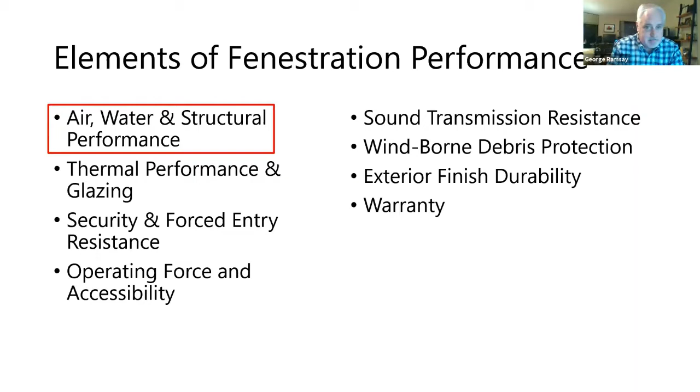So just to make it as easy as possible, we're just going to boil it down to air, water, and structural as being the basis of this presentation. I will touch slightly on the rest of this, but it's mostly going to be on air, water, and structure.

So the biggest thing here is one of the most common questions I get from architects and spec writers is to make them understand the difference between DP and PG. DP, design pressure, is a site-specific measurement, so we'll put in the actual address of that project just to get what the average wind speed is.

A good way to look at that is Miami versus St. Louis, two very different areas when it comes to hurricanes. St. Louis is in tornado alley. So just think of design pressure as being the basis of our calculations, and it really does come down to where that project is. Performance grade utilizes design pressure in that calculation.

But there's all these other things that go into PG, performance grade, and that includes all of this stuff. So DP is part of PG. When you go to specify windows, we'll use PG, performance grade. I just want to touch base on this, and then as we go through this process, at the end you're going to really get a lot better understanding of the differences in DP and PG.

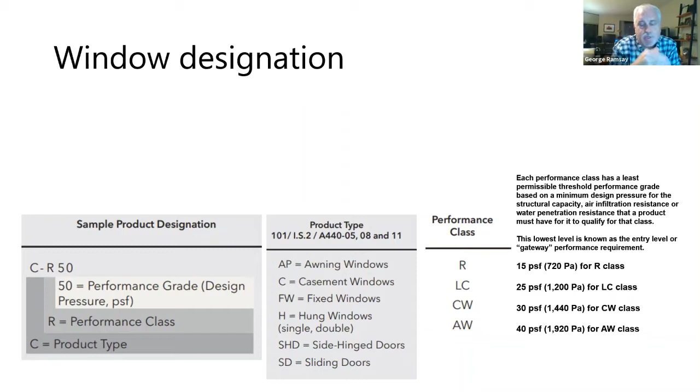So AW is the granddaddy of all performance. That's where you're seeing in your high-rise windows - that has to meet an AW requirement. At the end, I'm going to touch on why AW is pretty much in a separate class. It has a lot higher requirements in addition to this gateway test.

So let's start off with wind pressure on a building and how that affects these calculations. It's not just wind speed - it's location, it's the exposure of the wind, the building height, location of the windows, the size of the openings, the type of the building, and occupancy.

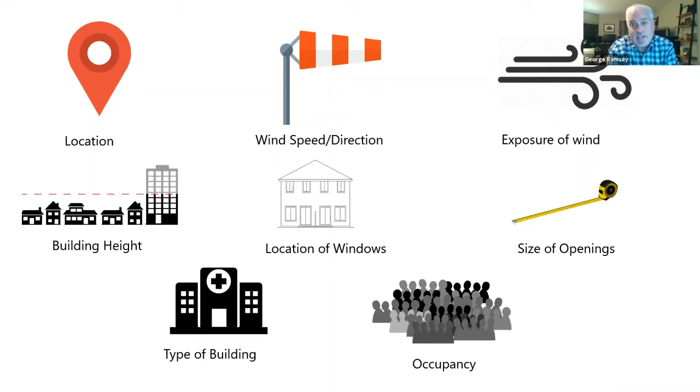So reference documents: this all springs from IBC, the American Society of Civil Engineers, where they talk specifically about this wind load provision, of ASCE 7 dash, I think it's even 12 or 16 now.

The AAMA, WDMA, CSA 101, or NAFS 101, we call it - that's our Bible as part of the fenestration industry. That really lays out everything that we have to hit, the testing requirements and all these codes and standards. And then we're all going to put it into how to specify performance for windows and doors using all this information.

So the IBC states that design professionals are responsible for determining wind pressure. So the engineers are going to do these calculations. As a window company...

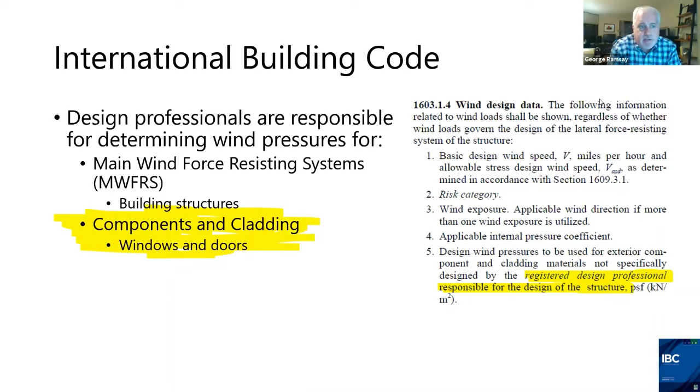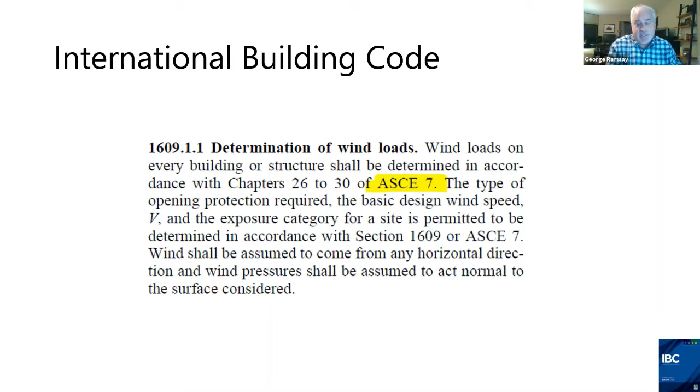So we're always going to look at the structural engineers as giving us the ultimate wind loads that we're going to hit, but window companies will verify this. There's a couple of things I'm going to get into that not all engineers take into account. There's some deductions that some engineers and architects are fine with, but other engineers will say no, we're not taking any deductions. So I'll get into that a little bit more.

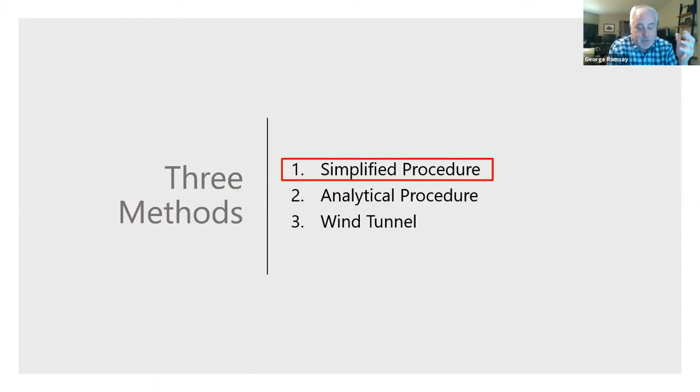So let's go into the ASCE 7-10 for DP requirements. There's 3 different methods, and for simplicity's sake, we're just going to deal with the simplified procedure. As projects get more complex, you can go into analytical procedures and then wind tunnel testing, which is actual lab testing for really tricky installations.

So we're going to have a case study, and this is One Southdale Place. It's up here in Edina, Minnesota, a suburb of Minneapolis. There's actually 3 buildings: a 10-story, a 5-story, and a 3-story. So it gives us a couple of different heights to look at.

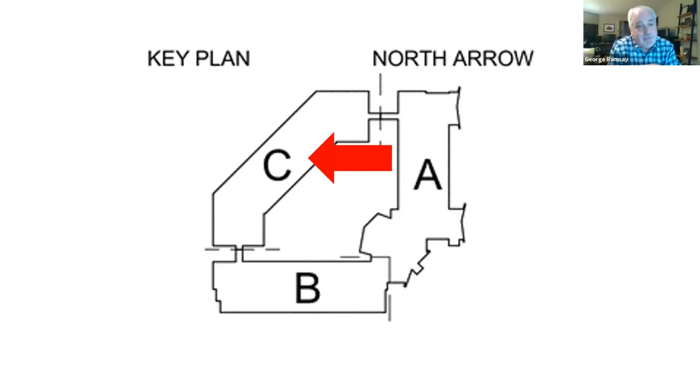So for simplicity's sake on this one too, we're just going to look at building C, which is the 3-story, about 33 feet high. Building B, 5 stories, was at 55 feet high, and then building A was 10 stories, at 107 feet high.

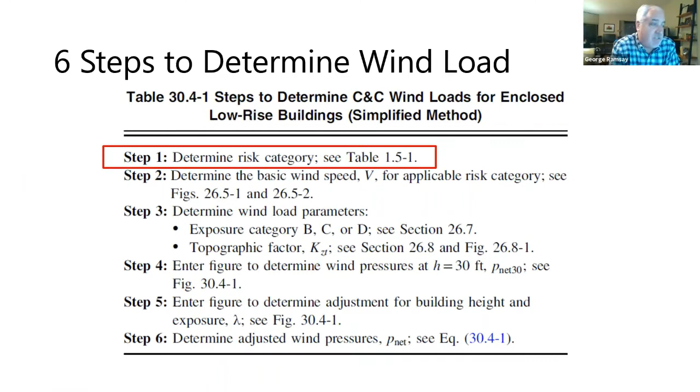All right, ready? So there's 6 steps to determining wind load. The first one, we're going to determine the risk category, and that is based on what is the end use of our building.

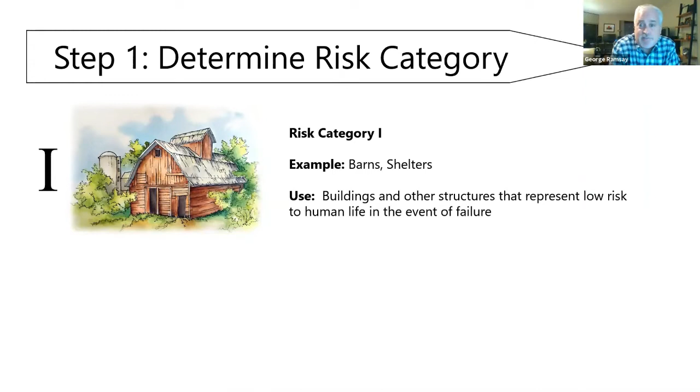So when we think about what that end use is, risk category 1 is a pretty simple structure, barns and shelters, low risk to human life, pretty basic. As we go up to risk category 2, it's going to be 1 and 2 family dwellings, multifamily, office buildings, and all other buildings and structures not 1, 3, or 4.

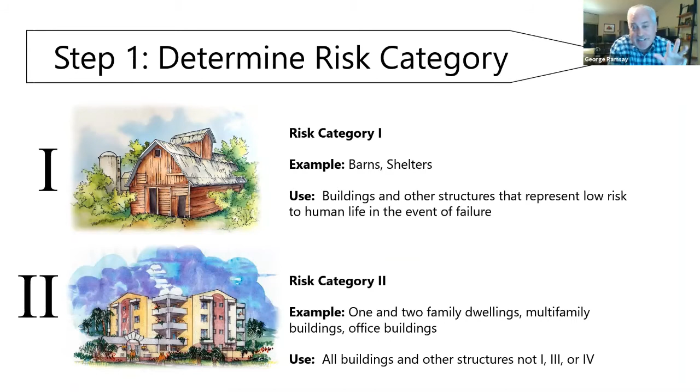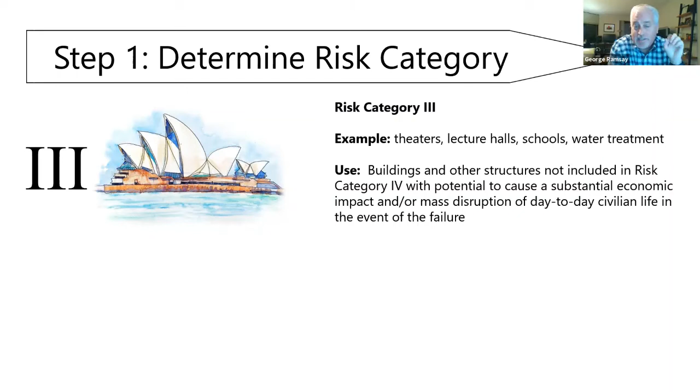And then 3, theaters, lecture halls, schools, water treatment plants. So now you're seeing that this risk category talks about how many people are in there, if there is failure due to wind or storms, that it's going to impact how that building functions.

So risk category 4 is hospitals, fire stations, emergency shelters, buildings with extremely hazardous materials. Failure of these buildings would pose substantial hazard to the community. So when you talk about risk category 4, this is the highest level, and it really does call for a lot higher performing products.

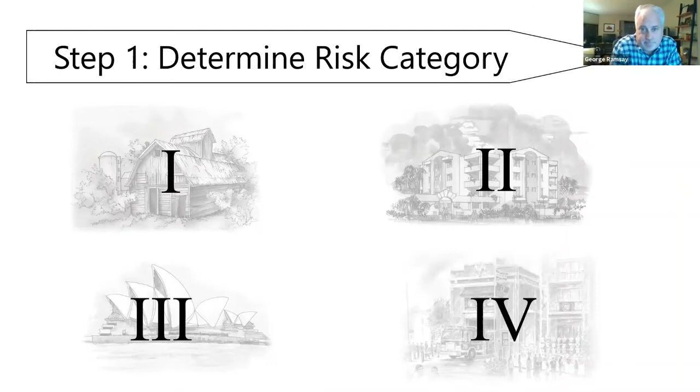So in our instance with Southdale being a multifamily, what would our risk category be? If you said 2, you're correct. And then that would go along the top of that worksheet.

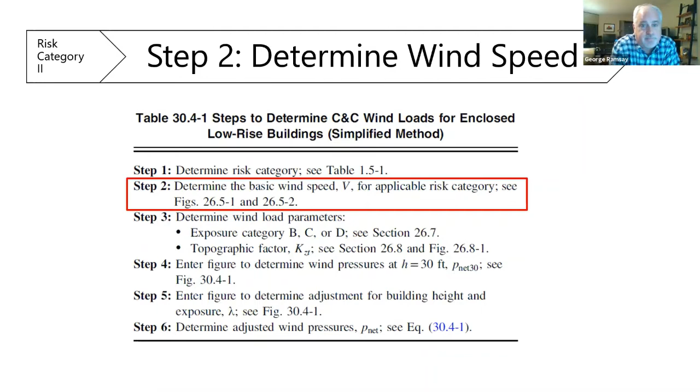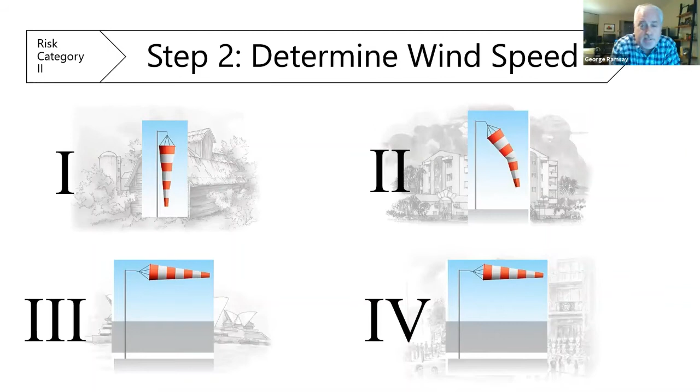All right, so now we're going to determine the basic wind speed for that risk category. How do we do that? Wind speed is contingent upon the risk category, location of the building, and what type of building it is. So let's look at determining the wind speed, 1, 2, 3, or 4. We're also looking at higher levels of wind.

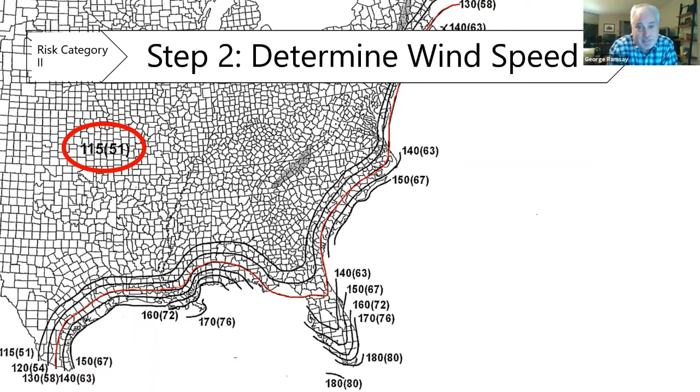So now following along on your worksheet at the top, we have risk category 2. Our wind speed is going to be 115 miles per hour based on our chart. But then let's ask, what if our building was a hospital? What happens? That means that they add a little bit more of a higher required wind load to meet.

So it goes up 115 to 120 miles an hour in the Midwest, but you're seeing now down in the Keys and Miami, it goes from 180 miles an hour to 200 miles per hour. So this really impacts the hurricane zones. As most of you know, it just takes a lot higher performing materials for those areas, but it does impact the Midwest slightly.

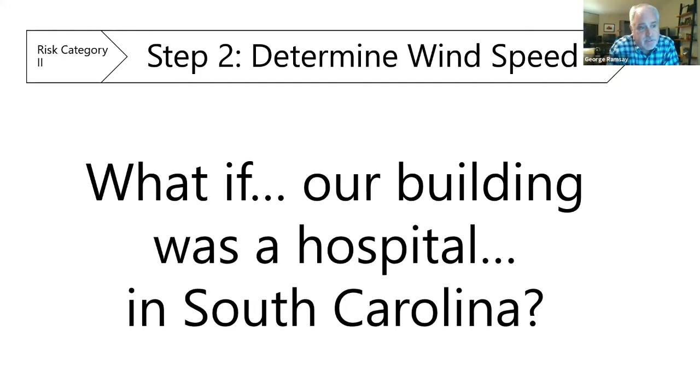So then let's ask another question: what if our building was a hospital in South Carolina? What's that going to do? So we're down here in South Carolina. Before it was at 150 miles per hour, now we're at 160 miles per hour. So there's a 10 mile per hour difference, which doesn't seem like much, but it really does have an impact on things.

I got called out once in identifying an assisted living. I was looking at it as a multi-family when actually assisted living counts as medical. So it did impact that risk category, and we had to increase what was required for the windows.

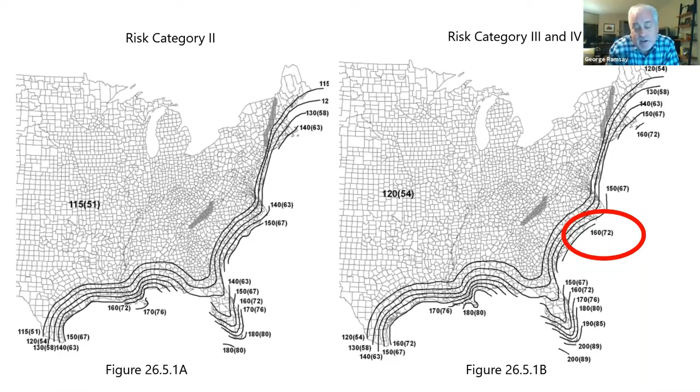So sometimes there are little things that you have to keep in mind. Like I said, the engineer is always going to help you, and then our architects and engineers, your window supplier company, will also run these calcs too.

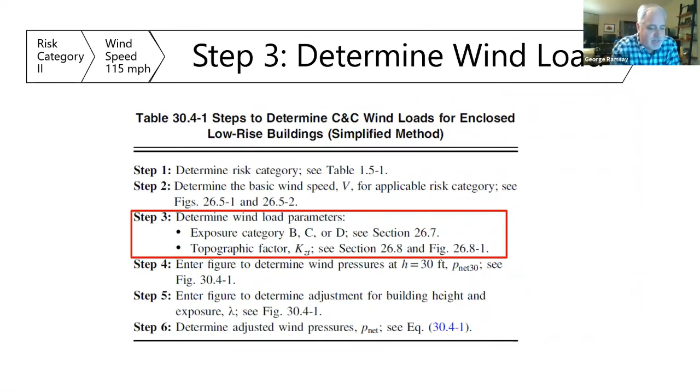B is for urban and suburban areas, wooded areas, or other terrain with numerous closely spaced obstructions, having the size of single-family dwellings or larger. It's also upwind direction of at least 2,600 feet or 20 times the height of the building. It gets a little more complicated, but just keep B in mind as being for an urban or suburban area, okay?

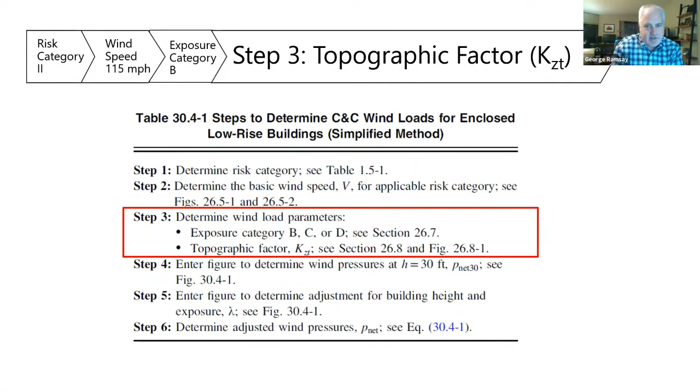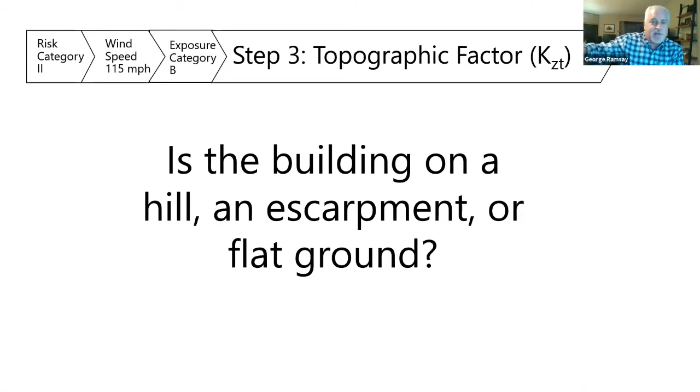So now for topographic factor - what is that? It's whether the building is on a hill, an escarpment, which is just like in Billings, Montana, a butte, or on flat ground. This is just showing you how they're determining how that speed works. As it's going upwind, you see it speeds up, so it can affect how wind pressure hits the building.

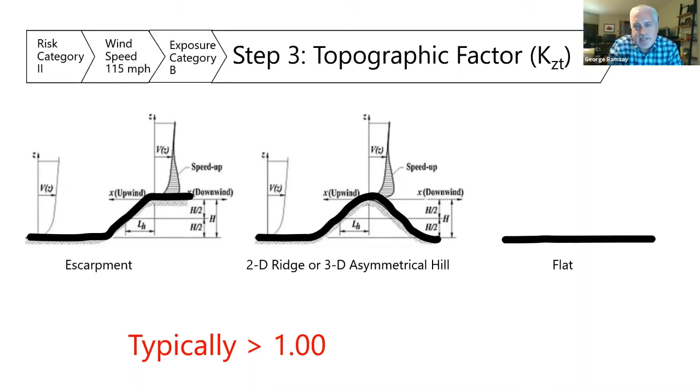So typically it's going to be 1. I had one building in Billings, Montana, built on the side of a butte that we did have something other than 1, but 99% of the time it's going to be 1. Okay, so step 3, topographic factor on your worksheet, we're going to put 1. That's just taken into consideration on the area and how it's affecting wind.

So now this PNet 30 is determining the wind pressure. As wind hits a building, a lot of people think it's going to blow the windows in, which it can. But really what happens - when you see tornadoes or hurricanes on TV and you see these buildings blowing up, what do you see? You usually see the roofs coming off the top, right? Or you see the walls blowing out. You'll see windows blowing out - they're not getting blown in.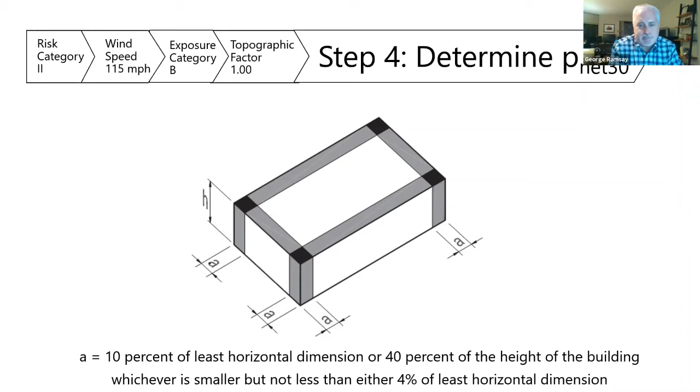We're going to calculate this, and it gets a little into the weeds, but it's pretty simple to just think of it as 10% of the least horizontal dimension. You get into 40% of the height of the building, but not less than 4%, blah blah blah. As a rule of thumb, just think of that 10%. So here we're looking at 10% of 66 feet, so I rounded up to 67. We're at 6.7 feet. If you took 40% of the 33 feet, we get 13.2 feet. It just gets a little too complicated, so we're fine at that 10%.

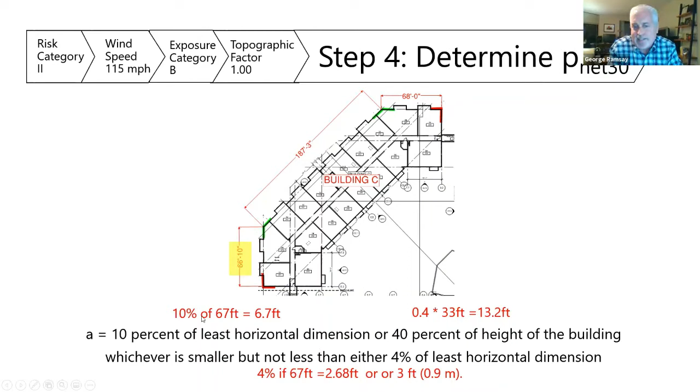That is going to be 6.7 feet on either side of that corner, so we just change that into 6 feet 8 inches. What's important to remember here is any window or door that touches that zone 5, in that 6 feet 8 inch area, has special considerations to take into account, because as that wind hits the building and wraps around the corners, there's really more negative pressure going on in those corners.

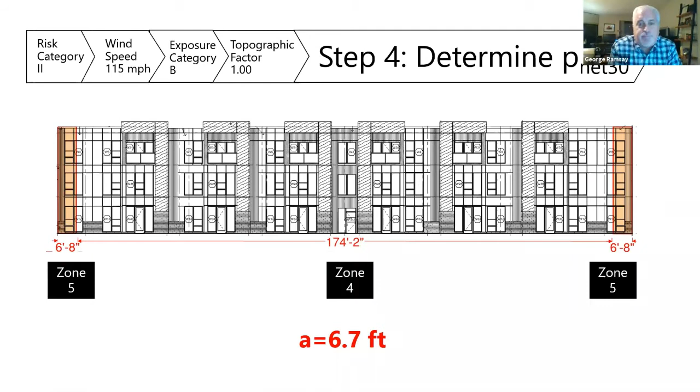At first it doesn't seem logical, but think about a small window, a larger window, and an even larger window, and just blasting wind at that opening. On the smaller opening, it's really acting like a tunnel, so it's increasing that pressure. That's why the smaller the opening, the higher the pressure.

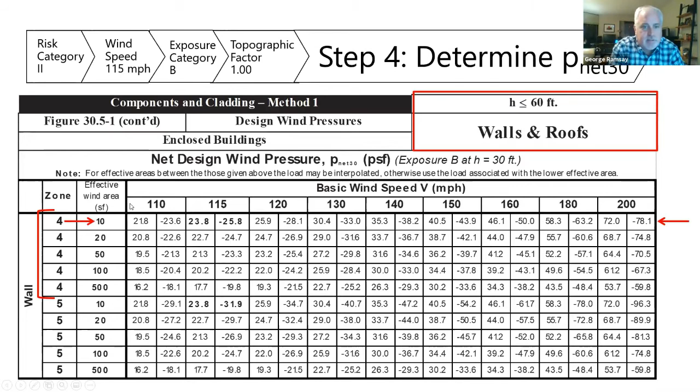We're just going to use 10 square feet here for simplicity's sake, and that 115 mile an hour wind speed we talked about before. We have our positive pressure and our negative pressure, and here we have zone 4, which is 90% of the elevation, zone 5, which is that 10%. Now we're getting our design pressures. We have 2 different design pressures. You can see negatively, it's really affected. Interestingly, positive stays about the same. But as I mentioned, that negative pressure is really what causes the damage.

In our zone 4, most of the elevation, we're at negative 25.8. In zone 5, the corners, we're at 31.9. When we deal with these wind pressures, we're always going to round up to the next 0 or 5. So in this instance, with 23.8, we're going to go to 25, and with 31.9, I'm going to go to negative 35. It doesn't get that exact, so we're always going to go 20, 25, 30, 35, 40, like that, okay?

Is it all making sense? Anybody have any questions right now? Okay.

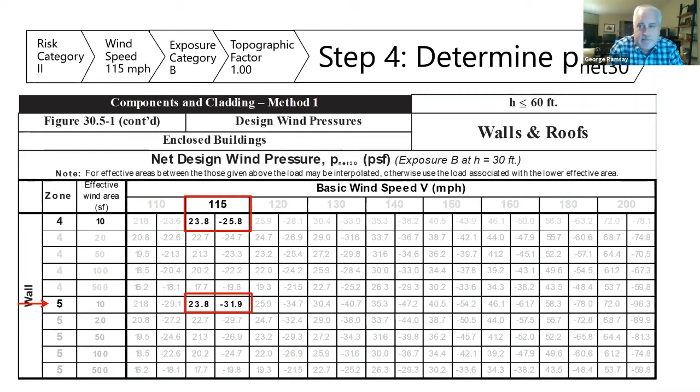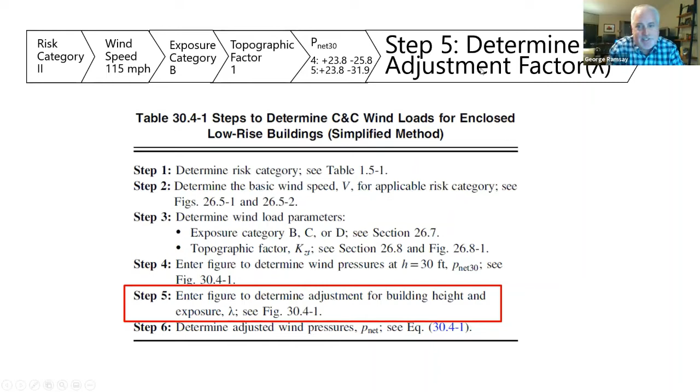So now we've determined our design pressures, our P-net 30. We had our zone 4, positive and negative, and our zone 5, positive and negative. If you're following along on your worksheet, put in those 4 numbers. Now we're going to deal with an adjustment factor. So what is the adjustment factor? We've determined the height of the building is 33 feet for our building C.

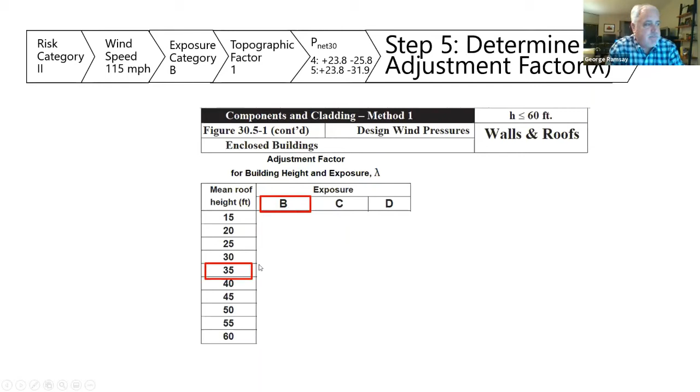So if we have our exposure B, we're going from 33 feet, rounding up to 35, and we have a chart. For that, that's 1.05. And then you can see as your exposure goes to C and D, that adjustment factor increases, which really can impact the performance.

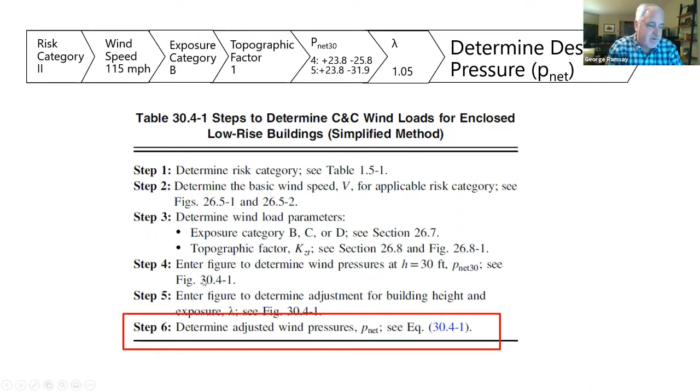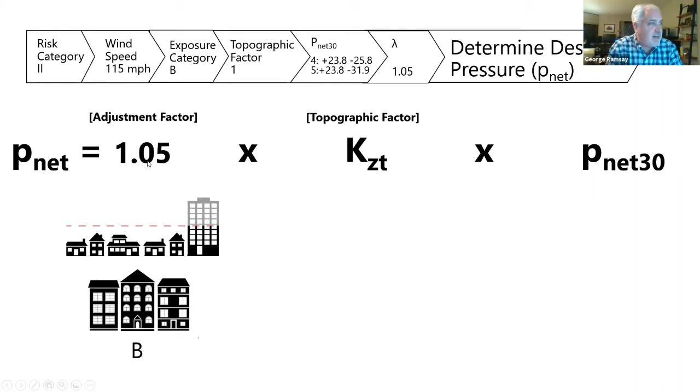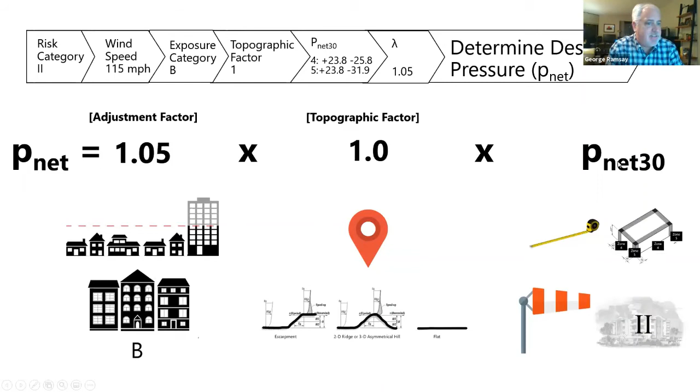So put in 1.05. All right, now we're finally going to get to our design pressure. So all this stuff we've looked at, step 1, 2, 3, 4, and 5, we're finally going to get what we need to meet for our building. There's our lambda, we have 1.05 from up here. Our topographic factor was 1. Our PNet 30 was our different positive and negative pressures. And then we also have our exposure category down here and all this other stuff now.

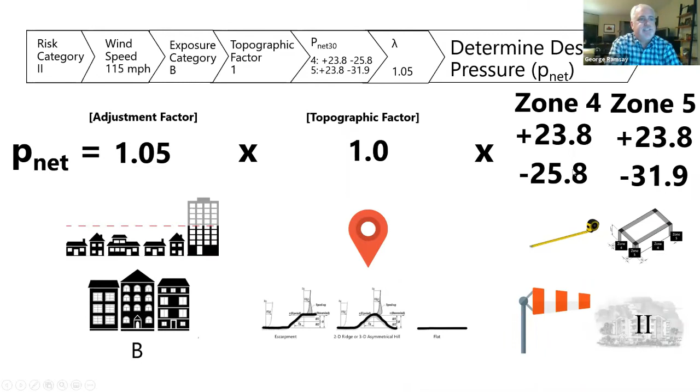So you can see here, this is our design pressures here in the upper right, zone 4, zone 5.

So now here, I was talking earlier about this deduction. This is some interesting stuff going on in the industry right now, and it's a pretty good debate between engineering, architecture, the window manufacturer, and what's going on with the building, especially where it's at. We can take a 0.6 deduction, okay?

So what that does is when you're looking at this ultimate strength, that's what we figured out. Here's the 23.8 and the 25.8 for zones 4 and 5, and 31.9 in zone 5 over here. We can times that by a 0.6 deduction, which really knocks us down below 20, which is like the minimum you're going to get. That was that R performance class.

So I've talked to engineers and architects who say, you know, we're not going to deal with that, we're staying with that ultimate strength design, and that's up to you guys in the project. Just note that this is allowable under IBC code.

So what this means, now we're at on our 33-foot high building, it's not really going to significantly impact that performance requirement, but as you get taller, it can impact going from a CW window to an AW window, which impacts the price. By no means am I comparing performance to price when it comes to these complex projects, but somewhere in there is a happy medium where you can meet the performance and save some money if you are on budget.

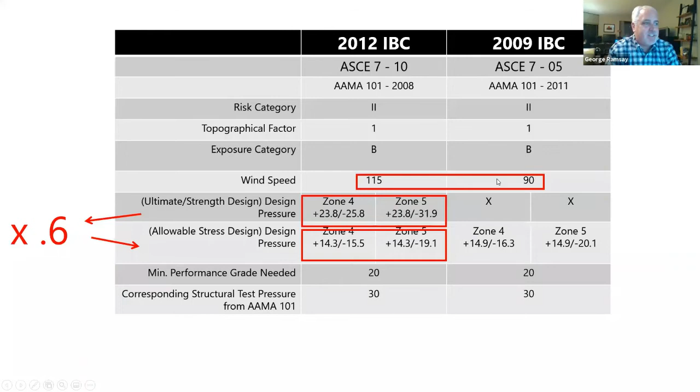And then this is just showing you the difference. This is the big thing that happened between 2009 and 2012 IBC. They increased the wind speed, but they allowed for this deduction. So now we're going to throw out what we determined, and now we use these newest figures for our PNet, for our design pressure. So you see it really lowered the bar.

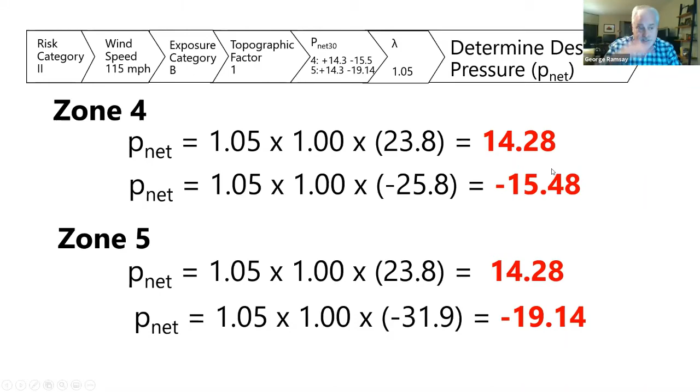All right, so now we have our design pressure, we're going to need to calculate water performance, okay? And that's going to be based on AAMA 101. So how do we do that? We need our DP, and we're going to times that by 0.15. Okay, so our DP,

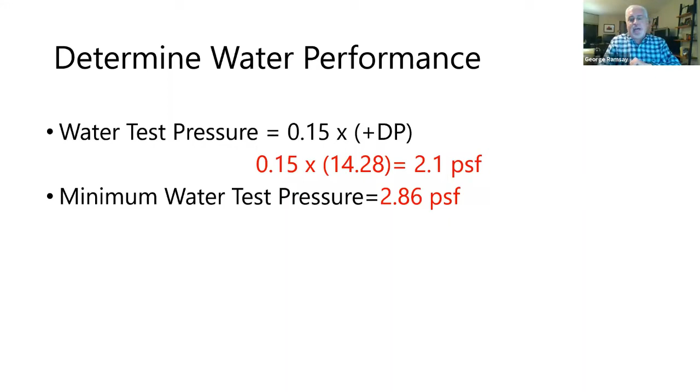14.28. So I'll go back here. We're using this one, our zone 4 and zone 5 positive pressure, times 0.15, and we get 2.1 PSF. That's hardly anything, right? So we have a minimum water test pressure of 2.86. So even though we calculated underneath, see, that's what I'm saying, with that deduction, we're really into this - anybody can make a window, basically, that can meet this performance. So they have come up with a minimum water test pressure of 2.86.

And that means that no water leakage at 2.86 pounds per square foot, and that's the equivalent of 8 inches of rain per hour at 34 miles per hour.

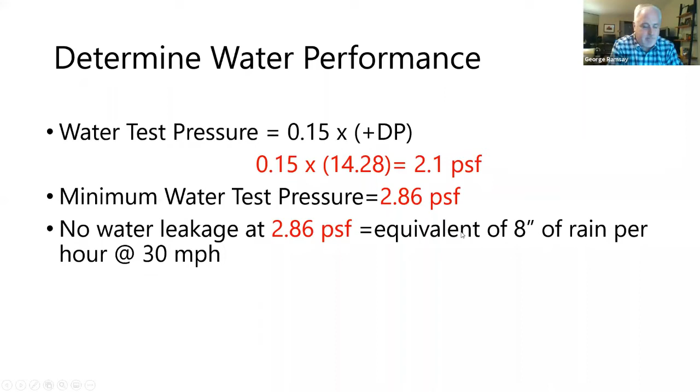And it's a good test for these large, especially multifamily, projects - we see it a lot. It's better to test the windows and the installation before they start putting in all the windows. You just want to make sure everything is right. So we're all about specifying water tests.

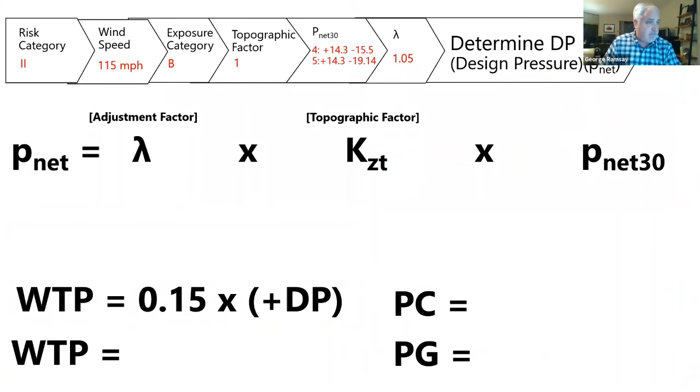Okay, getting back to our worksheet. So we have all of that stuff, and now we've figured out our water test pressure. So that's what came up here. Our 0.15 times 14.28, we determined it to be 2.1, but we have to meet the minimum of 2.86. Oh, I just see a spelling error right there.

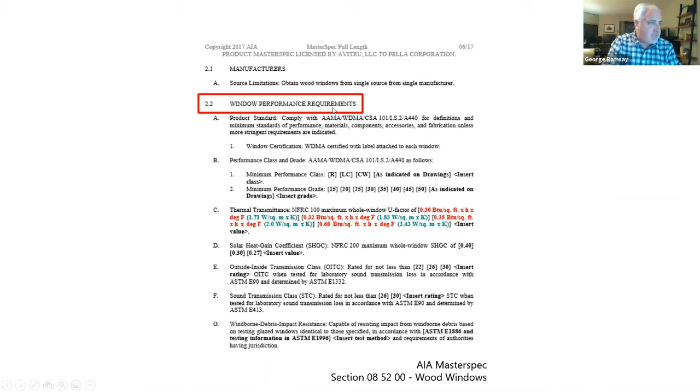Okay, so 2.86 for water test pressure. So now, how are we going to put this all into specifying air, water, and structural performance? Looking at our friendly spec here, window performance requirements, we come down into our performance class and grade. So we talked about R, LC, CW, AW if needed, and then our minimum performance grade.

So here's how we get the performance grade. We have our negative 15.5, our negative 19.1. I'm always looking at the negative numbers because these are always going to be larger than the positive numbers. So it's instinctive for me to go to those negative numbers because those are always going to be the ones that we need to hit. You always round up to 20, and in this case it'd be 22... well, 20. So, performance grade of 20. Everybody understand that? Hope so.

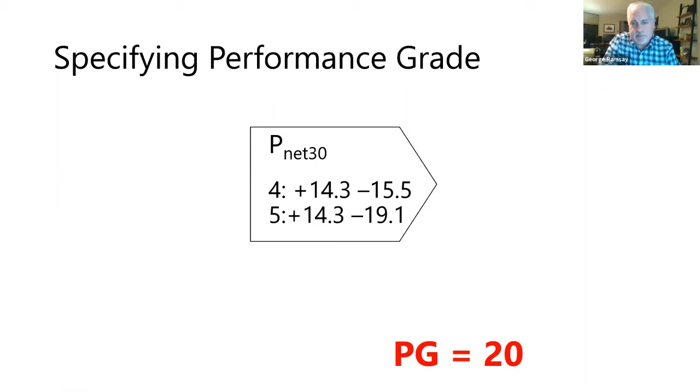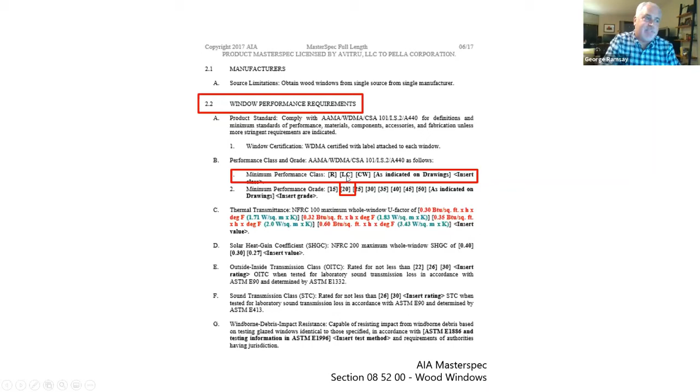Performance class. All right, that's going to be up here, and really, it's a light commercial building. So here's how we're going to look at this. Once again, this is a pretty complicated slide, but I'm just going to take this old stuff right out. They're going to build up the slide here. Here's where it was back in 1997. Like I said, there were 5 of them. You can see it was based on air infiltration, minimum water test pressure, and then minimum design pressure. And you can see it's nothing too major until you start getting up into the heavy commercial and the AW.

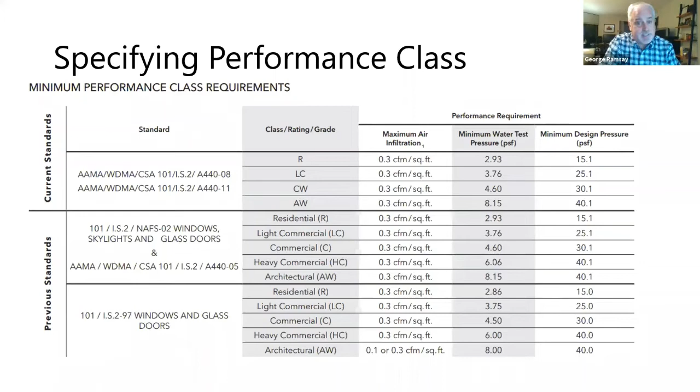So then it all changed about 10 years ago. Now, here we are at R, so residential, 2.93, 15.1 minimum design pressure. AW, once again, that's where you're getting a significant bump. So that's what we're always looking at. R, LC, CW, most window manufacturers make these windows. AW, we make AW windows, but you're getting into a really higher performing window at AW.

So R, and back in one of my earliest slides, I talked about these minimum gateway requirements that go into R, LC, CW, and AW. I still call it residential, light commercial, commercial, and architect, but here's what they really want you to consider it. R, commonly used in 1 and 2 family dwellings. LC, low-rise, mid-rise, and other buildings for larger sizes and higher loading requirements are expected. CW, even higher requirements, limits on deflection, heavy use. And then AW, high-rise to mid-rise, but really increased loading requirements, deflection, and extreme use of fenestration products.

So, as I said, there's no code, no standard with this. This is just some basic thinking about that performance class. Now, as I said, there is minimum testing that goes into this, so it's not something that just needs to be dismissed. But we see a lot of times where spec writers and architects are specifying CW windows where LC can be used. So that's fine, but sometimes you're over specifying. And we see AW being specified where you can use LC or CW, and that's fine, but a lot of times that impacts the cost.

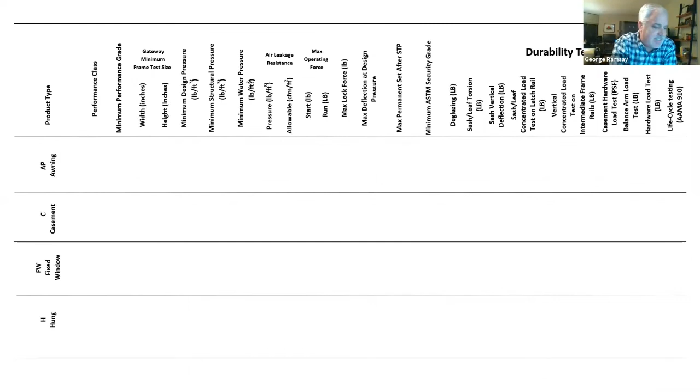So minimum performance grade, I've talked about that at length. I hope that makes sense. Here's that gateway minimum test size. Then we're talking about our minimum water test pressure. So we were dealing with 2.86 before.

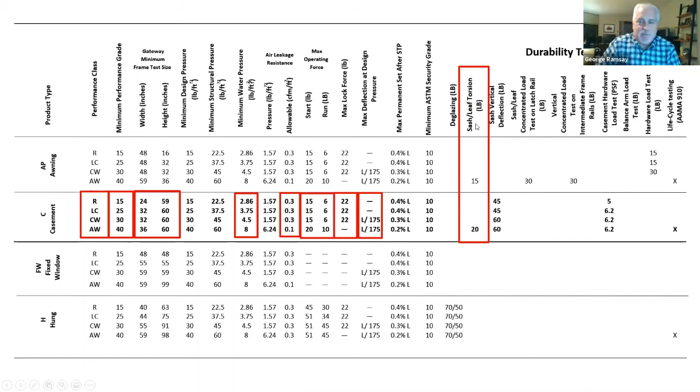And then there's other things like max operating force, max lock force, max deflection. There's sash leaf torsion that I have a slide just to show you what they're doing there. They're just measuring that deflection for the leaf torsion test.

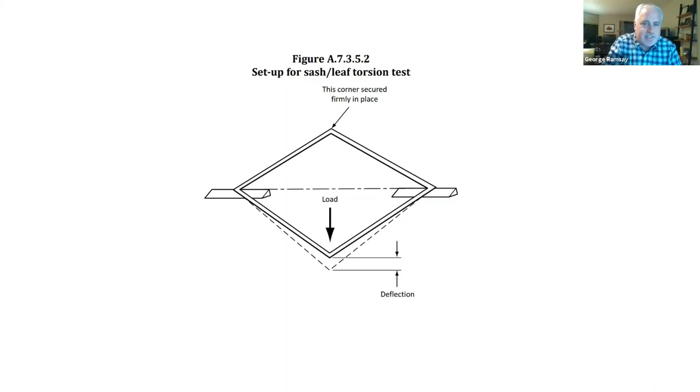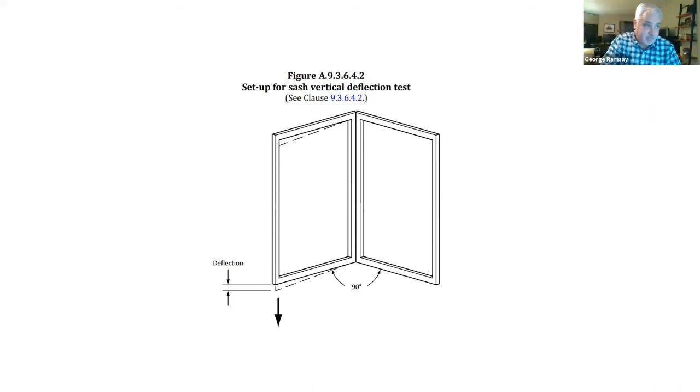So a lot of people don't get this deep, but if you need to know, we test all these windows. Every manufacturer has to do these tests. So sash vertical deflection test. There's casement hardware.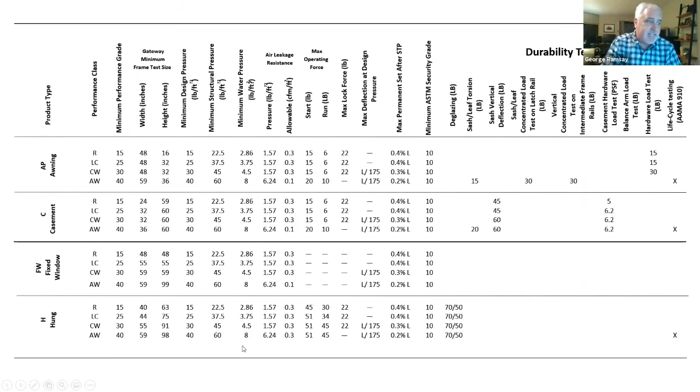And then once again, just looking at AW here, they have a life cycle test too that AW is considered for. So that's the important thing, is AW is just at its own level here. Casement hardware load tests. This is just all these testings here.

Okay, so we're getting down to the nitty gritty. Thanks for hanging with me. Hopefully this is starting to make more sense.

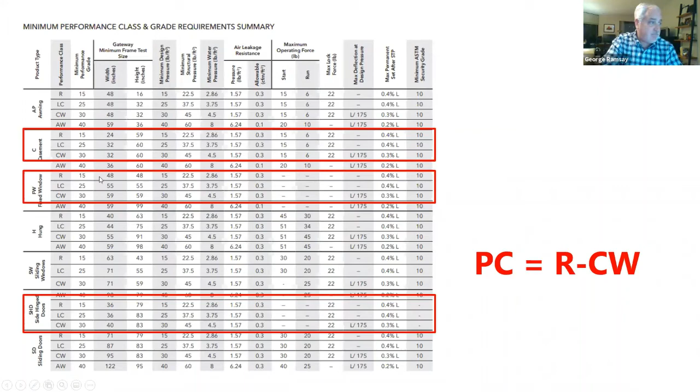For our final performance class, we're going to determine that R through CW is going to make the grade. Once again, AW is just a little bit more than what we need. And then just looking at this for further going up the chain, there's product and design options that we can always look at too.

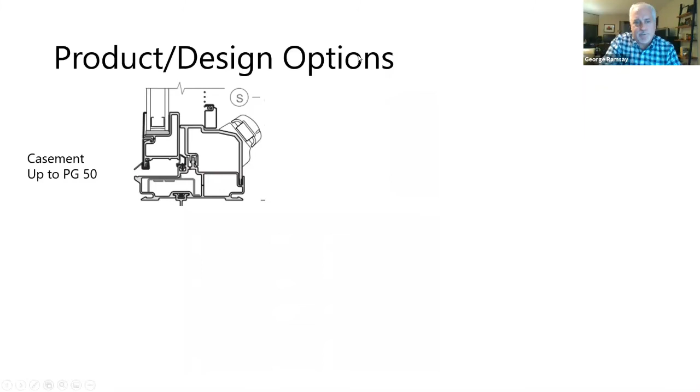So for casements, the hardware going up to a performance grade of 50. That's inoperable, in fixed frames, pretty easy to get really high performance. If you do need some increased performance in some of these projects, if you stick with a fixed frame, you can go up to PG 90, relatively easy.

And then, as most of us are aware, on outswing patio doors and talking about water resistance, here we have a standard sill up to a DP 70, water resistance at 10.66, pretty good water resistance. We go down to that ADA sill, we have the DP 70, but there's no water resistance. That sill, you can see there's just no gasketing, no real blocking of water coming in.

So as most of us know, this is kind of the holy grail right now, as our company's looking at options to get some kind of thing in here to help water resistance.

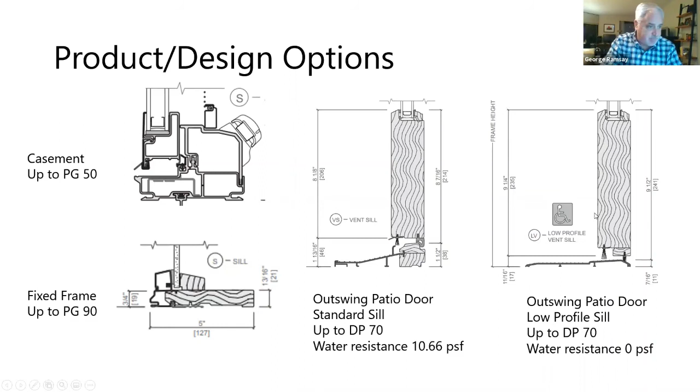So now getting back to our worksheets, now we've figured out our test pressure, our performance class, R through CW, and our performance grade of 20 to 30. So we figured out we were at 20, but they're going up to 30 just for that increased performance.

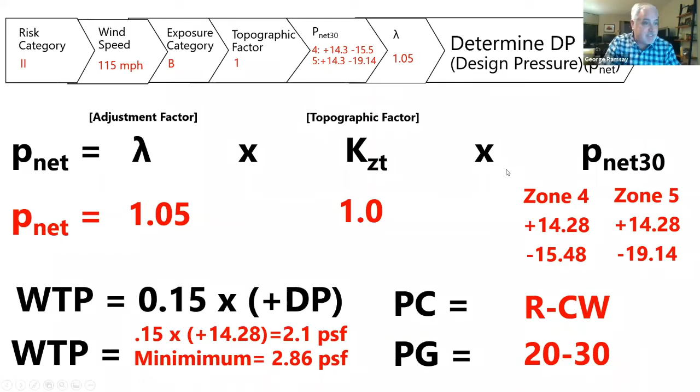So now, if you remember that blank worksheet that was blank, we've worked through all this. So I know there's probably some questions, probably some clarification. I'm open to hear your comments, concerns, complaints. Anyone? Would love to hear some feedback.

George, I have a confession to make, and that is that I feel really dumb or really old. What happened to the HC window, which was sort of our go-to back in the day when I was writing specs?

Yep, and that was that 10 years ago where I don't know, George, what really changed everything to go to that, but yeah, they went from the 5 performance classes to 4, and they took that HC window out. And as far as an explanation, I don't have an answer for you. I can talk to one of our code guys who's been with Pella for 25 years. I'm sure he can answer that for you. I can shoot you an email.

And sort of the follow-up to that with the 4 classes now, is there visually any difference among them? Because now we're maybe having to mix different classes where, you know, years ago you didn't do that. So if you have one right next to the other, will you visually tell the difference?

That's a great question. So depending on what material you're using, like an AW window, the highest performing window I've seen, an AW 100, something 110, which is a pretty beefy aluminum window, a pretty thick, deep frame, and it can just withstand being put into the Empire State Building, and you are going to notice a difference. Just the frame is going to be beefier. They're going to have thicker glazing. Yeah, another thing that you can look at is vinyl windows are just coming on stronger.

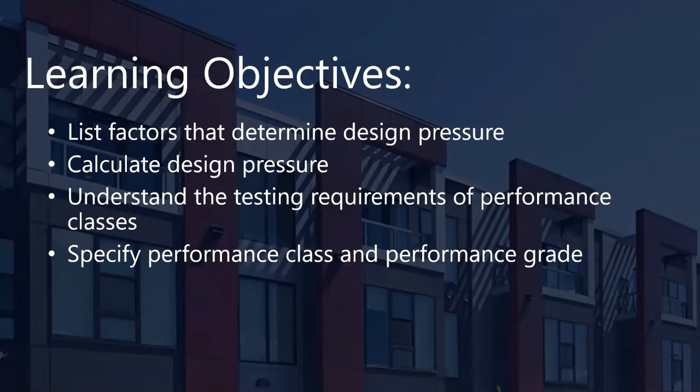You've got a corner window that withstands greater pressure than in the middle of the elevation. Do you ever see on jobs where they mix up the spec, and so they don't put the right window in the right place?

I have seen that. I've seen everything from tempered windows going where they're not supposed to go. But then if you're specifying different performance levels, you got the corner and you have the mid elevation, that has to be clearly marked by the window manufacturer. Because yeah, it's happened for sure.

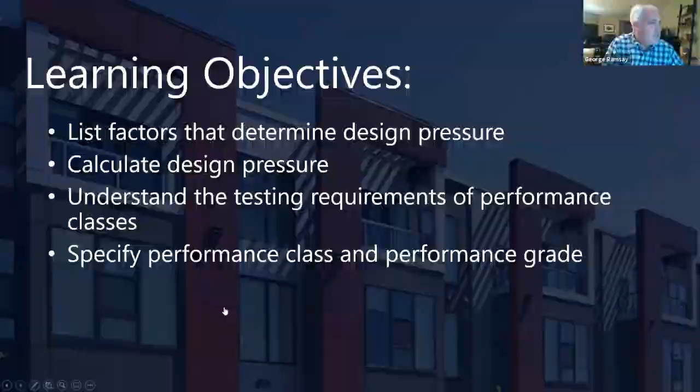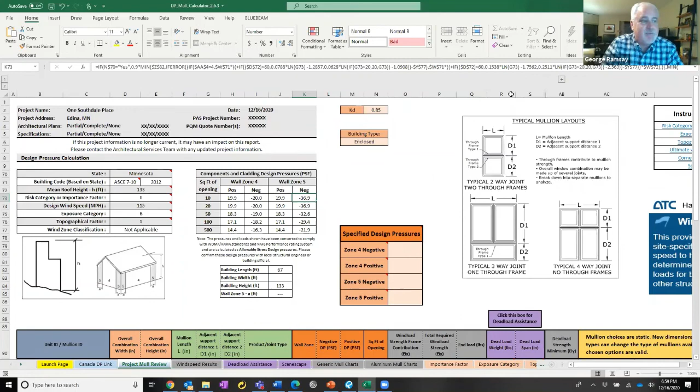I wish I would have shown that sooner. I hope not everybody dropped off, because this is what we use a lot. So instead of going long-handed, this is where the engineers have it made in the shade because they have all these calculators and look really smart.

Is that a Pella product, or is that something you get elsewhere? Excellent question, I think that's George. This is a proprietary calculator, and then we use it for mulls too. So we can put in additional information based on height and width to get different mulling options, because as I said, that's an important part of it too.

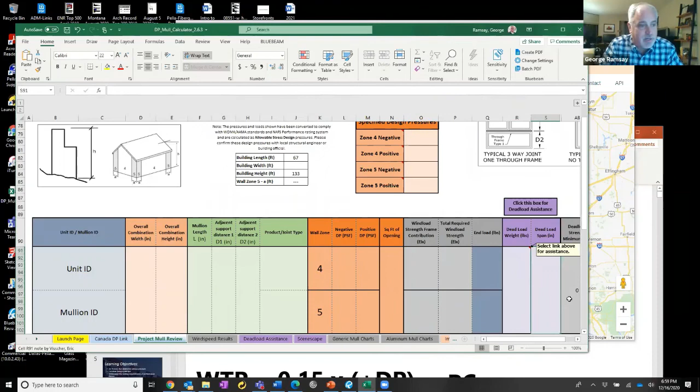And Steve or I can do these calculations, just basic ones. I never do anything on behalf of an engineer. If you guys just need some basic information, we're happy to do this, but I will always submit for an official design analysis, we call it, that's done free of charge. And that is done by one of our engineers and is signed off on, where the architect or spec writer can take that to your structural engineer and just make sure we're all on the same page. And if we're not, it always comes to a conversation on, okay, what are we missing? What are we doing differently? Does this impact, how does it impact performance, and how does it impact cost?

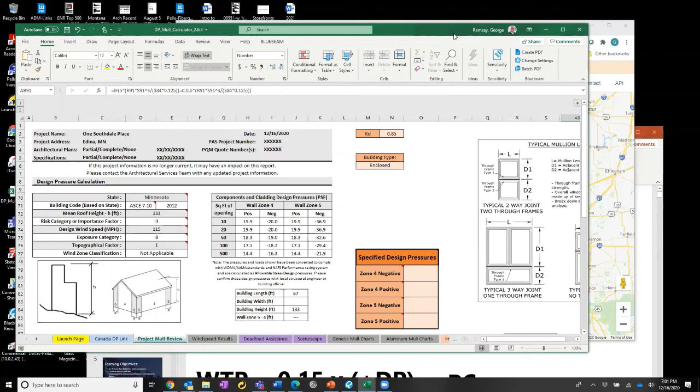All right, George. Well, I think hopefully we didn't lose Derek, and he's off the ceiling now, because he was pretty anxious when I saw some of those. Still shaking. I'm still shaking. But I feel better.

So some of this is just picking the right column and knowing what each column stands for, and just kind of pick and go from there. So I think that's good. And I think the other thing, as you said, and we all appreciate, is when in doubt, we can give you a call, and you can help walk us through some of this as we need. Absolutely.

But George, one of the things that strikes me about this is those of us in our age group recall what it was like taking our architectural test and learning about seismic, right? We had basically a Z-factor thing we had to learn, and as our careers developed, they learned more about earthquakes, and that factor changed, the maps changed. It strikes me that with windows, it's basically the same thing. I mean, obviously this is the result of decades of experience, probably from failures and so forth. That's really cool. It's good to see that it continues to change for the better.

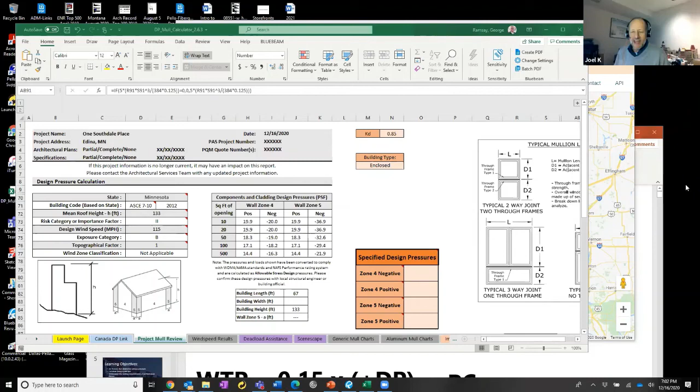Oh, and they continue to improve what's going on in the hurricane zones, especially. There's constant conversations and improving standards. Well, they've had some hard lessons, and they've learned, and they've been able to analyze more about what really happened, as opposed to just 'oh well, this blew down,' and so now we know a little bit more about that. Yeah, building science, that's where it's at. Yep, it continues to get refined, and we get pressures from multiple directions with trying to refine these.

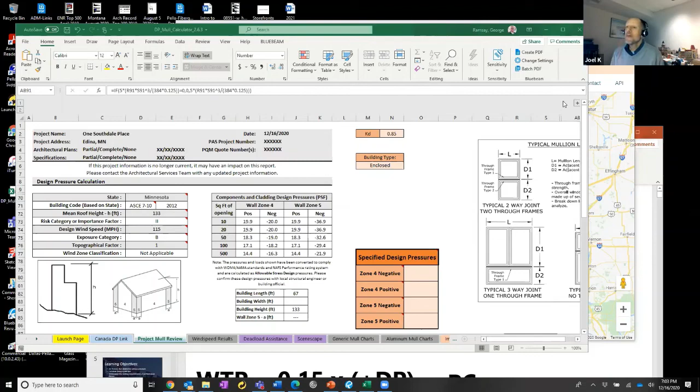Once again, George, thank you very much, very interesting. Hopefully everybody got some enlightenment out of this. If nothing else, we now have a couple of good names to go talk to if we have questions.